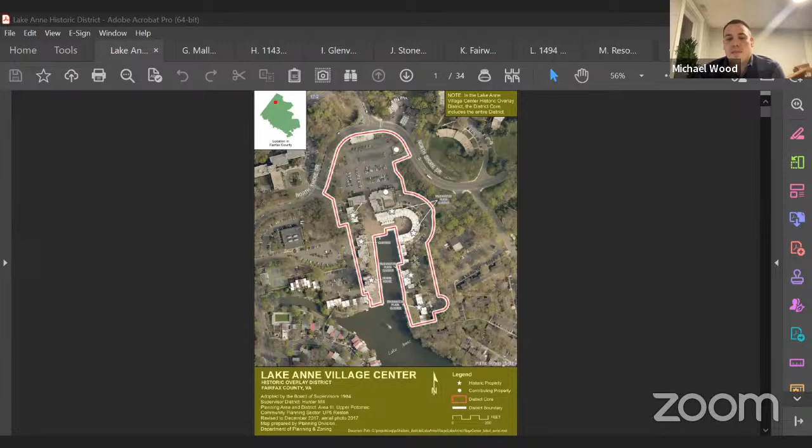It would be good to definitely be able to track applications that are in here and run them through. To me, they should go through almost the condo process first with the condo association, then go through Reston Design Review Board, and then come to the county. Both of us could give our official recommendations on the projects to you all before you guys then review them as a part of the building permit process. That's how I would view it, I think would be the best way. But I don't know which path it took.

But anyways, I do think it is a good idea to get us involved, especially when there are obviously applications in Lake Anne.

And Arisa, you want to drop ARB from it too. Sorry, since you recorded this, I want to make it clear that while in my day job I work for the Advisory Council on Historic Preservation, I am in no way representing them during any of these meetings or when I serve as chairman of the Architecture Review Board. The reason I say that is literally for my day job I do historic preservation work. That's how I know Elena. We intersect through our professional careers.

But yeah, I think that is the challenge. I would encourage, obviously, we want to make sure legal is always providing the right kind of viewpoints when we can. I think if there's something approved by the DRB that's in the historic overlay district, if staff could convey that approval to us, that would be fantastic to know. Because Denise doesn't always have that answer when I put her on the spot. I've sometimes asked Denise if this has gone through the design review board at several of our locations, and if she has it in her file, she can say yes. But because you all aren't a county board and we aren't a local board, there's not that pipeline connecting those two unless we decide to share it. So it might be something to think about: do you want to convey approvals or denials to the ARB if the board feels passionate? Because then at our meeting we can know that for our record.

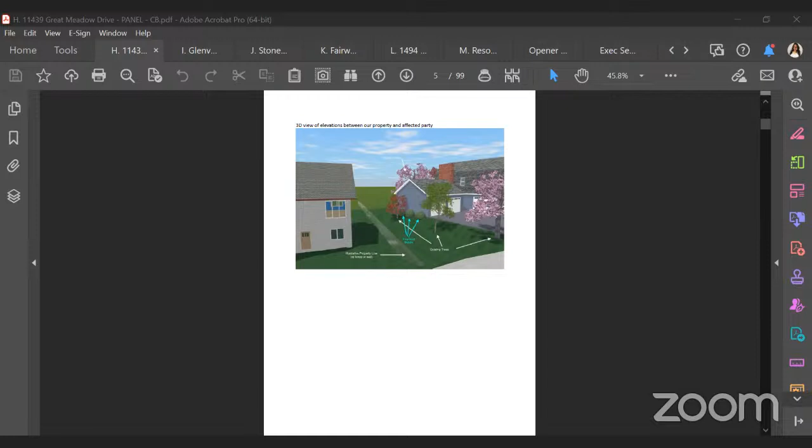Then on the next page, there are two views of the street—driving up and driving down the street, as passersby might see it.

On the next page, there are 2D drawings showing updated distances. Michael, you were correct—there was an error on the drawing about the distance between the chimney and the proposed garage. That has been corrected to 3 feet between the chimney and the garage, which makes the distance between the house and the garage at the front over 5.5 feet.

And because of the reformatted garage, it increases the distance from the affected party's window, which was a point of concern, as well as increasing the distance to the property line. All of which I think are positive changes.

The gutters and drainage amendments that we proposed in the second design review board meeting will carry forward. Obviously it will be slightly different just because the dimensions change, but they'll still run along the same paths and run to the back of the houses.

On the final page, or second to final page, just confirming the reformatted dimensions from 30 by 20 to 26 by 24, as well as the door widths. On the last page are the elevation drawings and related views, including the affected party's house.

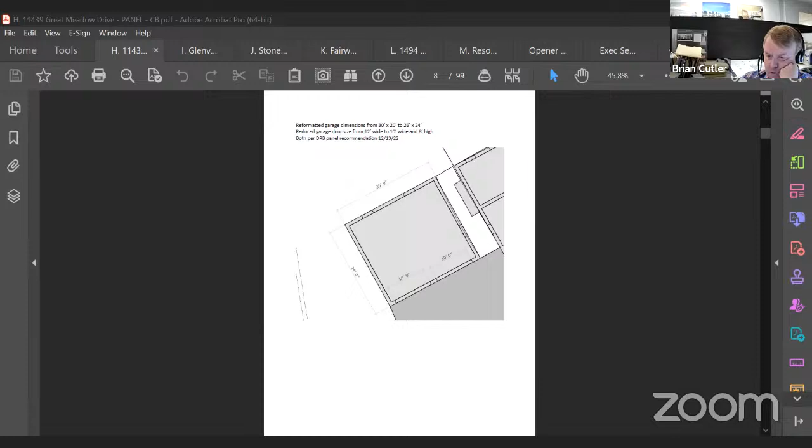Okay, thank you. Brian, did you have any questions? I think the only question I have is, are you expanding the driveway at all, or are you using the existing limits of the driveway? It'll be close. I believe we will need to fan out the back left of our driveway a little bit to reach the edge of the garage, but I would not consider it overly significant.

Okay, I only asked because I'm wondering about the couple of trees you've got between you and your neighbor. I'm not sure where those fall, if those would be affected by this fanning out or widening of the driveway. That's the only reason I ask.

Thanks. Yeah, going from the street back we have a cherry tree, a maple tree, and a Japanese maple. The first two, the larger older cherry tree and the newer maple, definitely not affected. We don't think the Japanese maple will be affected either. If it was affected, it'd be by the garage and not the driveway, and if it were affected, we have plans to move it or relocate it because we don't want to lose it.

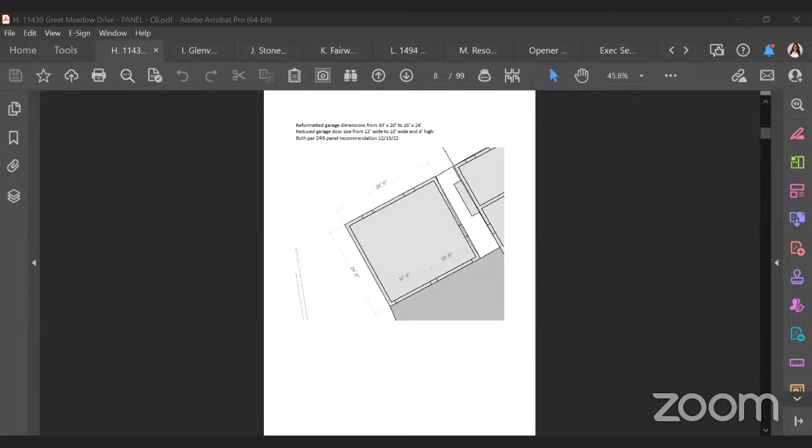Thank you, I agree with everyone else. I think the revisions you made are nice. They made some nice revisions, so thank you. John? Well, that's exactly what we asked him to do, and I have no problems with it.

Bruce, any comments? No, I don't. Mike B? Nothing for me. And Jim? Nothing from me. All right, and I don't have anything either.

The only comment I would say is I think it turned out much more improved than when it first came to us, for the better. I think it looks really well put in with the surroundings now and with the existing house, so I appreciate you doing that work and getting us these renderings. I know they can't always be easy, but I think it really helps explain why we wanted them, and helps communicate this project a little better. I think that's probably why the affected party isn't here tonight, and also it did help some of their concerns with the massing and scale — this addition is not nearly as large as it originally was looking like. So those are just my comments.

Would anyone want to make a motion? I move we approve the revision. We have a motion to approve. Do I hear a second? I'll second. All right, we have a motion and a second. Any further discussion necessary?

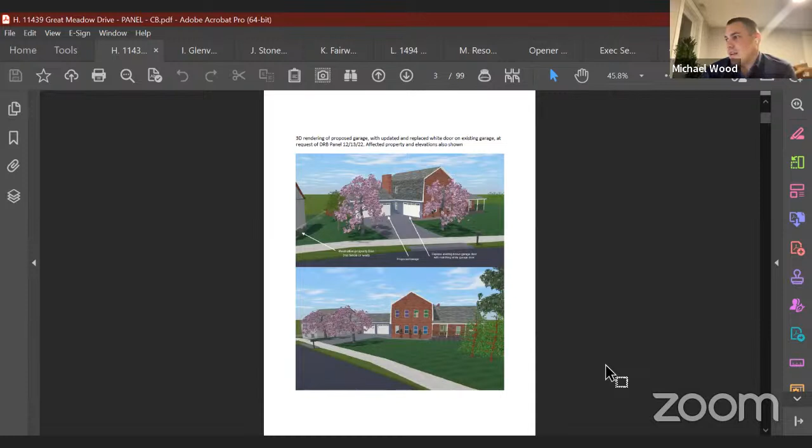Yeah, I mean his letter, his explanation does include those things. Oh, I'm so sorry, I did miss that. Okay, then never mind - yeah, they both call out the pavers and the tree specifically as well. So all things that the applicant has thought about, just for the record.

Any further discussion? All right, all those in favor say aye. Aye. Aye. Any against? Any abstentions? All right, motion passes.

Thank you, Justin. Yep, thank you. And Michael and John, thanks again for your help in December - this helped get us here, so I appreciate it. Thank you, good luck, thank you.

All right, moving on to Glenvale Condominium. I believe they are looking for some cameras. Hi, this is Amanda Rodriguez, I'm their on-site manager. Hi, Amanda. I've been to these meetings before, but never had to speak.

So I'm not really sure what you're looking for me to add to the application. Well, if you could just walk us through briefly what you're doing - obviously it's pretty straightforward in the application, but just walk us through. I think the highlight would be how the cameras are going to be installed, how many of them, and any other pertinent information we ask. But worst case, we'll go around and ask you some questions.

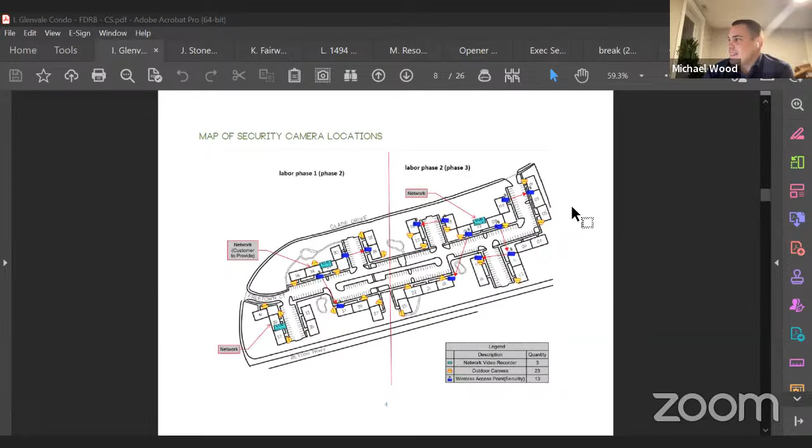It says 23, Amanda - just for the record, it does say 23, then that's the correct amount. All right, 34 is our number of buildings, so that - yeah, sorry. Yep, I know I had a number in my head, it was just the wrong one.

And then we also are proposing signage to just let people know coming on the property and throughout the property that they're under surveillance. Those signs are being proposed to be attached to other signs that already exist on the property so that we don't have to add more posts and all of the other things.

Okay. Let me go around the room and see if anyone has any questions for you, and then we will have some discussion. Sarah, do you have any questions for the applicant? No questions, thank you. Okay. Elena, do you have any questions? No, thank you. Brian, do you have any questions?

But our windows and doors are all that same dark bronze color, which is why we were proposing that color for the cameras. Is that more the camo brown color you're saying? Yeah, that dark brown, close to what your windows are. Yeah, the windows and the frame around the doors also have that brown color.

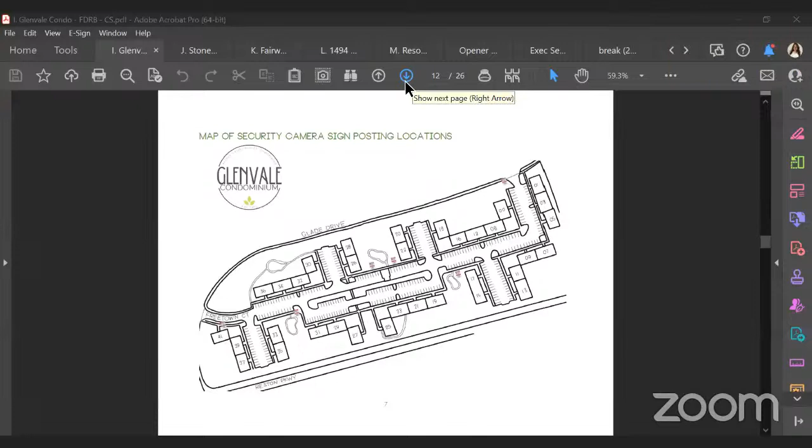The only reason why I'm mentioning that is some of these poles already have two signs on them. If you put a third sign on it, is it going to start looking a little bit crazy? It'll be like the parking signs in DC. Exactly, no one's going to know which one to read and which one's important.

That's my only comment - having multiple signs, I don't even know, staff, do we know if all of the current signage is approved on the property? You may not know that question. A lot of the time some of these signs may not even be necessarily approved. Do we know, staff? I actually don't know if all of the signs have been approved. I only say that because some of them look a little large.

So the only hesitation I have is on the signage. I don't mind the cameras - I think obviously they're a necessity, and I think the proposal is fine. I just think the signage potentially may need a little bit more information. I just want to make sure we're not putting three signs on one pole and it's going to be a little bit messy looking, versus maybe there's a nicer way to put a lower profile sign that has it lower to the ground, just on a single pole or something. I don't know, I just think it needs to be studied just a little bit more.

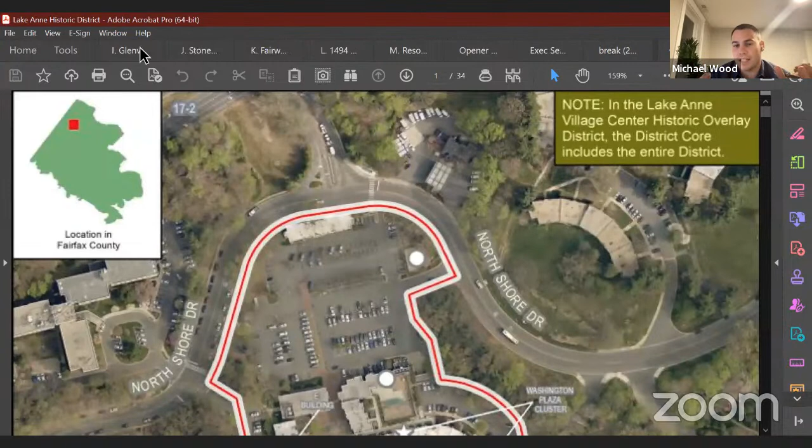That's just my opinion, the board may disagree with me, but that's my only opinion. The cameras I think are good to go from what I see, but the signage I think just maybe needs a little bit more work, and it may be an overall thing with your signage - I almost want staff to look into it. We've had different condo associations come to us with signage before, and we've tried to work them towards a more cohesive approach, less signs but more impactful signs, so people don't just see signs and walk right by them because there's so many of them to read. They don't even look at them, they don't even care. So that's all I'm trying to avoid, basically.

With that said, does anyone have, you guys want to, in the board, do we have any discussion? Is there a motion?

I'd like to discuss the option of just a motion to approve the cameras and deferral on the decision on the signs to let them study it further. Or I'll make that motion. I'll make a motion, unless there's someone else who'd like to discuss, but I'll make a motion to approve the...

Cameras as submitted with the stipulation we're trying to minimize the exposed wiring, that any accessories used to mount the cameras are dipped or colored, however they want to color code it, to match the color of the camera, and that the camera color match most closely to existing window framing, trim, as possible. And defer decision on the sign to give the applicant an opportunity to provide further information and study signage throughout the condominium association property.

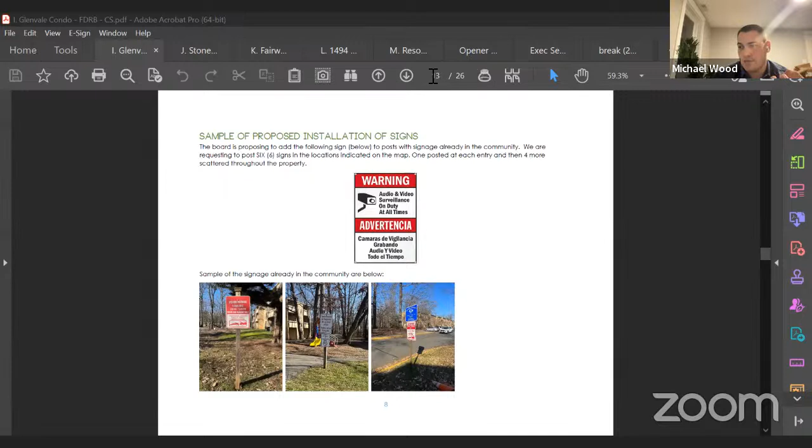What I worry about with the black cherry or dark cherry is that on the computer it may look dark, more burgundy red, but I worry it's going to get up there and actually be red. So I'd rather recommend the camo brown, as that looks closest to a dark bronze, and it will mimic what the windows should be. These windows are old enough that they've probably deteriorated over time, which is why they look closer to black cherry than the dark bronze they originally were.

So that would be my only recommendation to the motion, if you're okay with that, Elena — that I would designate camo brown. I'm fine with that. I am as well.

Any further discussion on the motion? I do have a question. Are we deferring the signage to the next available panel meeting or to the next full board?

It could probably go to a panel. With the deferral, I think they're going to look at providing how many signs are going to be on a pole that they're recommending. Since it's only six signs, I'd like to see what those poles look like with the signage, and I would ask staff to investigate whether the signs already there are approved, or if they need to bring a cohesive package back with the signage overall. So the signage, when they bring it back, should obviously include the size — just want to make that clear.

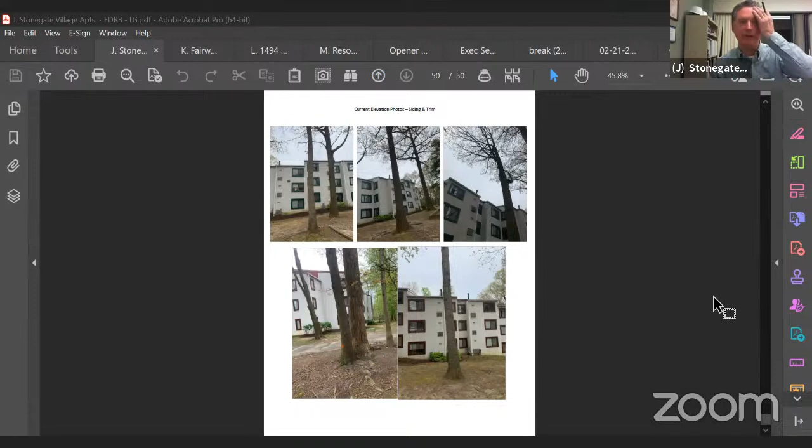So we're about 40% done with design, and we really want to get the DRB concurrence on some critical issues before we proceed a lot further and execute a lot of design effort on some things that we know are of interest to you. Notably these three things: site lighting, landscape plan and tree removal, and exterior.

Just to tell you, the interior is totally changed, all the windows. Right now, we've got a central laundry facility, and we're going to go back to individual washers and dryers in each unit. Not something you guys have purview over, but just thought I'd fill you in on that.

So it's a major project for us. We've got a lot of, before I turn it over to the experts, we've got some challenges on site there. We've got a combination of no sun, probably more topographic changes than any housing area or affordable housing area, at least area I'm aware of in Reston. I'm a Reston resident as well. We're by Lake Audubon.

And we've got some significant erosion problems that we're trying to deal with on site that we've got some solutions for. We're going to need your feedback. And as I'm sitting here going through the other applications, thinking a big part of this really, at this point, is us understanding what we need to provide you guys in the future to fully satisfy you on these big issues going forward. So we really realize we probably don't have it all, but we want to be super clear on what kind of things you might want to see to again satisfy your concerns in these three major issues.

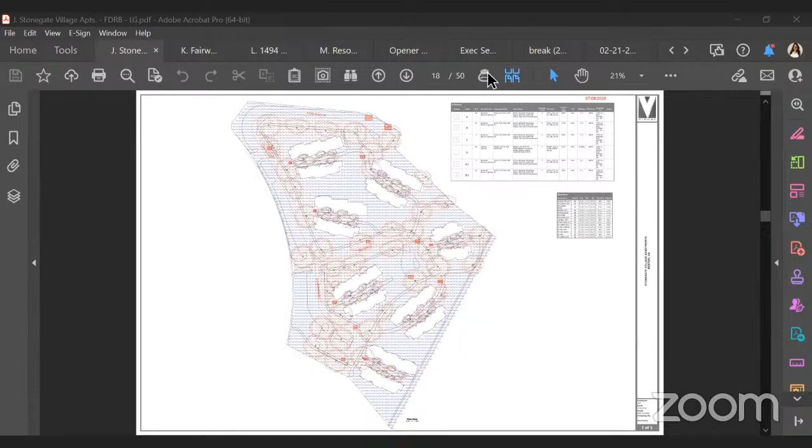So I guess what would be the next topic? Do you want to talk about the siding, or do you want to talk about the landscape? No, okay, that's fine, all right.

So I will pass this on to Connie and Lori Beth from LSG. Great, thank you, Kathleen. My name is Connie Finn, and I'm a principal with the firm LSG Landscape Architecture. And with me tonight is my colleague Lori Beth Donachie, the arborist. The renovation work impacts some of the trees on site, and we're here to present the proposed ideas, and want to seek some of your input as well.

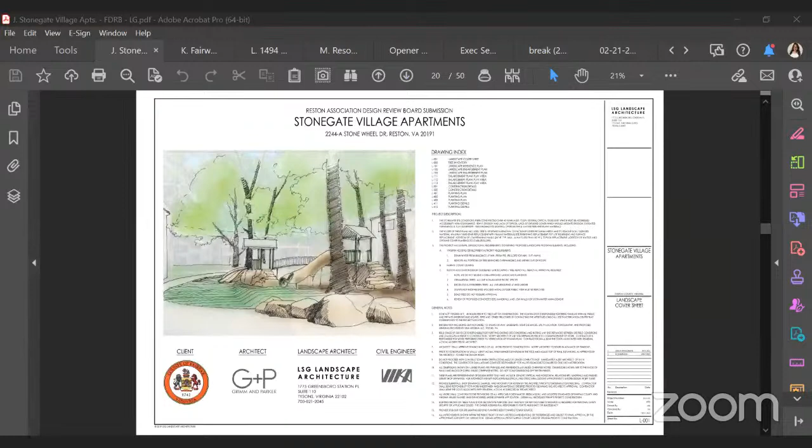So if you don't mind moving to the next sheet. The firm has done some tree inventory work, and Lori Beth, if you don't mind, give a high-level summary of the conditions of the trees currently on site.

Yes, so as you can see, we surveyed a couple hundred trees on the property. We went out and identified the species and the tree conditions. There are a number of species in between the buildings that are non-native, like crepe myrtles, Nellie Stevens holly, and magnolia. They've reached their mature size at this point, and they're very crowded and leaning, not providing good form to the tree.

Around the edges there are larger canopy trees, and we did have a number of trees starting to decline for reasons related to species. Some of them are white pine, which are just more short-lived trees in a landscape setting. Others show decline from storm damage over the years. So there's a number of factors impacting the trees on this site.

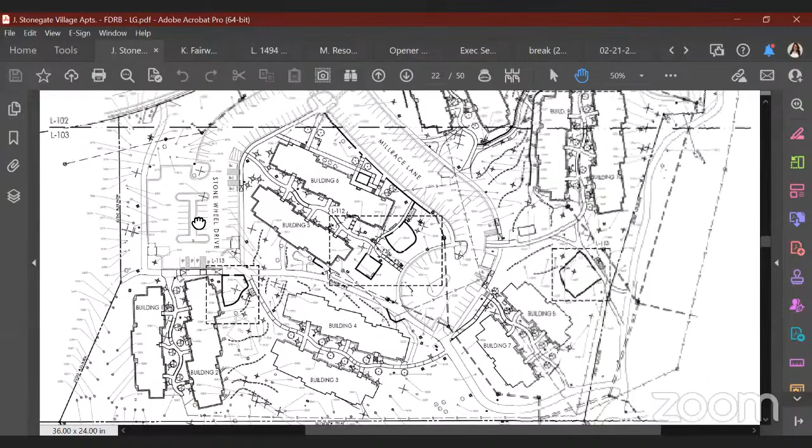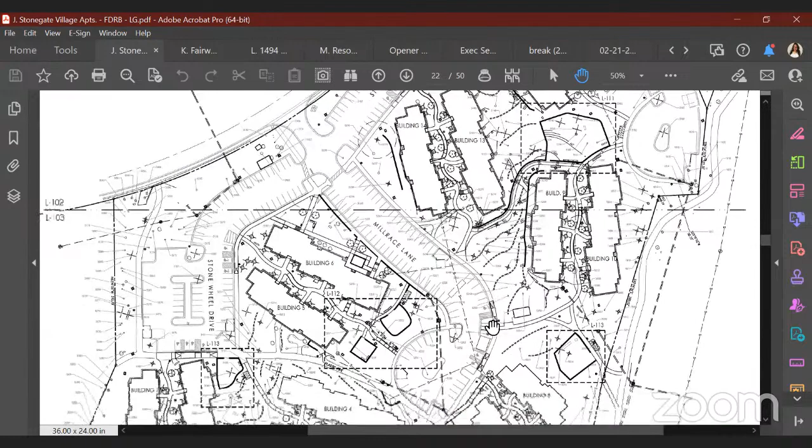And the views, as Kathleen mentioned earlier, the walkways leading into the entry to these apartment buildings are not ADA compliant. They're simply too steep, at about 7.1%. Part of the project also recognized that the current playgrounds are not up to code and not ADA compliant either. Also, as part of the fair housing requirement, we need to identify ADA parking spaces that would link to the ADA building entrances.

The team decided that in order to adequately address the ADA issue, the walkway between the buildings within the mews space needs to be regraded to bring it up to today's standard. That's why on some of them you can see they're much more meandering in alignment. The purpose is to increase the run of the sidewalk so you're able to minimize the slope as you walk down between the buildings.

What does that mean? Once you have to regrade within such a short distance between the buildings, it impacts existing trees like crepe myrtles and magnolias. As Lori Beth mentioned, these are non-native trees that have reached their maturity level, and as part of the regrading the disturbance will get into the critical root zone. That typically means the tree will have to be replaced.

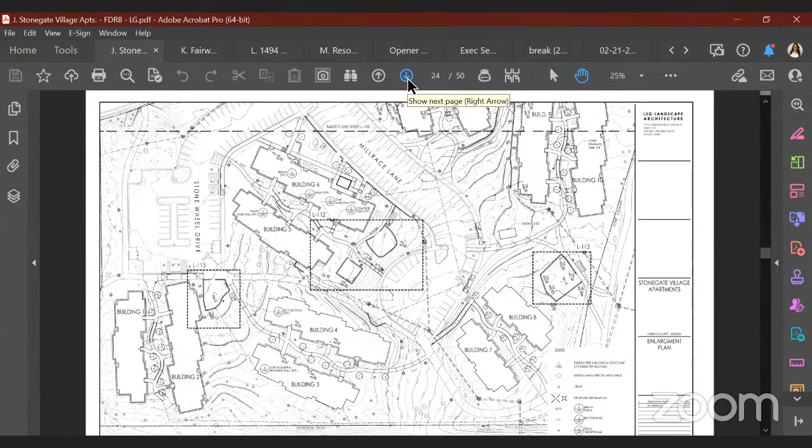Next slide, do we have? These are the earlier drawings we identified within the— I don't know who's controlling the screen. Staff, can we go down to like page 30 where it actually shows this landscape planting plan? Oh great, wonderful. Yes, thank you, thanks for flipping to that screen.

Even though the team has to remove some trees as part of the ADA compliance activity, as well as addressing the erosion issue, as you can see on the screen, the shaded areas are what's currently planned to receive additional landscaping. When we say additional landscape, we're talking about ground cover, shrubs, ornamentals, and large trees, once the county finishes the walkway system upgrades.

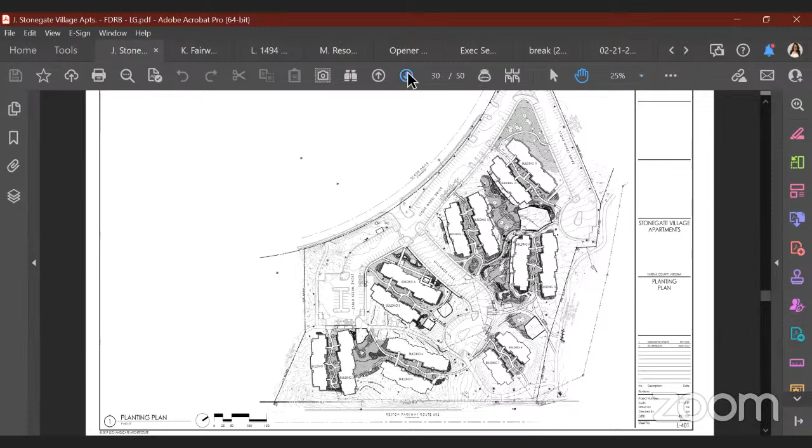Staff, if you go down a page, we can get a better zoomed in version of what they're talking about. Yeah, right.

I believe we are proposing over 500, right, Lori Beth, in terms of just quantity altogether? Yeah, approximately 500 new trees and shrubs being planted in addition to the trees that we're preserving.

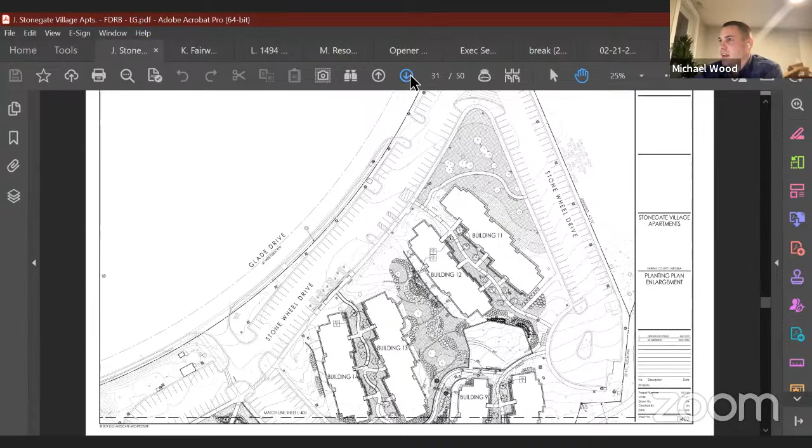If I could interject, is there any sort of schedule that designates what these all are? I didn't see anything, and I was curious if I was missing the page. Is it page 33 here? Normally they're labeled with letters or something, but it's strictly the picture, and we have to designate what they are on the table above. It's just kind of hard to read. Is that correct? I have to match the picture to this table to figure out what they are.

This is the plant schedule, the proposed plant schedule, Mr. Wood. The trees have been identified with symbols on the left-hand side, so are the shrubs. They have all been identified, with quantity as well on the second column. The ground cover has not been, since it's a family of plants that we identify differently. Like Tony said, this is earlier in the design phase. We typically don't get into the specific ground cover choices, but the trees as well as the shrubs have all been identified.

Okay, yeah, no, I understand that part. I guess I'm trying to figure out, for example, building 3, what that plant is that you're putting in. It looks like there's 20 of them to the left of building 3. Going down here, it could be a magnolia, it could be a flowering cherry. They all just look similar at my scale. So I'm just trying to designate what they are, that's all I'm saying.

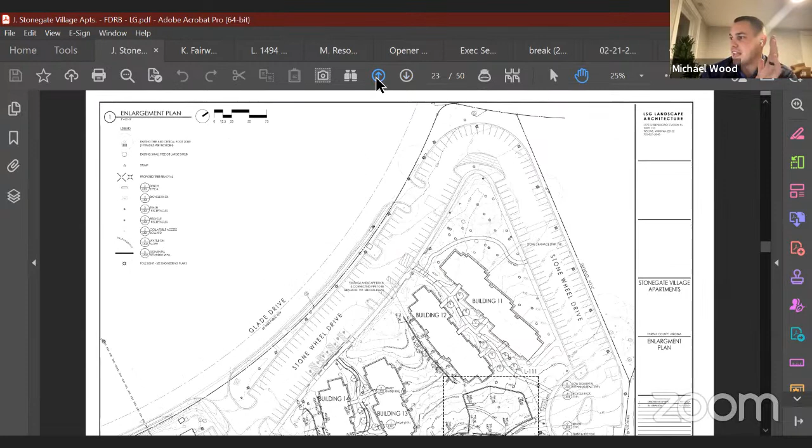And I appreciate that. That's what I guess, at the scale of the drawings and the way they're being depicted right now, it's hard for me to follow, and I'm just speaking for myself, maybe other board members could tell. I can see the new plan, I see that there's lots of plants going in, but I don't see exactly what the impact is on the site. I think Mr. Wood, if we got the PowerPoint in there, it would have this very nice summary. What Tony is referring to is currently we've identified 174 trees to be removed.

Because of erosion between the pairs of buildings, you can see squiggly lines on the plan. Those are the anti-erosion measures we're planning to implement within the wooded area, called biodegradable wattles.

Within that space, we've identified 30 trees to be removed to address the current erosion control issue. For the rest of the site, we've identified 43 trees scattered throughout that are having serious health issues, marked as potentially to be removed.

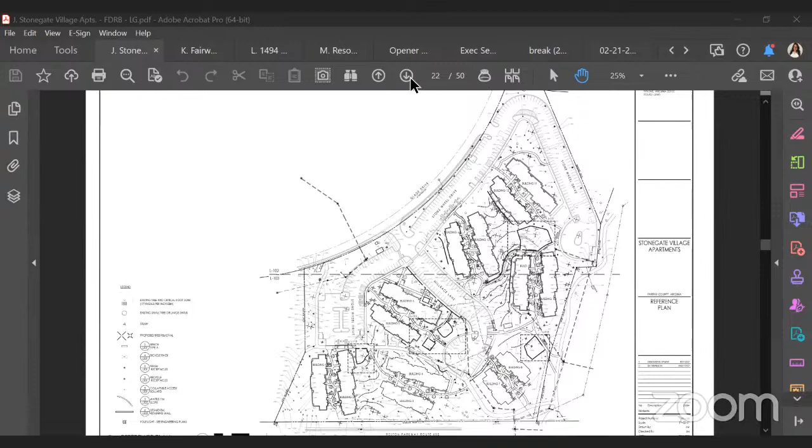The summary is on the first page, the tree inventory, probably page 21. All of them are identified there. Altogether, there should be 174 crosses.

Just full transparency, it's very difficult to read this. That's all I'm stating.

Tony, I think you're making it clear. It was on my agenda for action tonight, so the way I take it is I have an application I need to vote on tonight. If it sounds like maybe you guys are just looking for conceptual approval, where we're going in the right direction, but you'll come back with much more fine-tuned documents.

We had discussed early on that this was a working level meeting, and I think maybe that got missed. That was always our intention, to show you what we have at a schematic stage and get your input back on those key items.

I don't know how that decision gets made. This is new to us. This is again a very large project that we're still feeling out the sequence of work on. We can provide you whatever you want.

I just want you to be super specific as to what information you need from us to make you satisfied with the level of landscape changes we're doing here. We're getting to the siding in a minute, but that's what we're looking for. I don't know what that means as far as a response, but we'll figure that out.

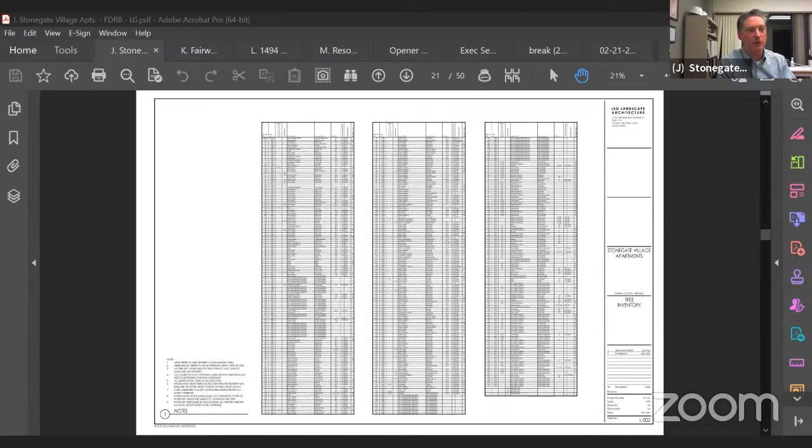We're not sure on the exact steps, but we tried to address that by putting the information in a different format with the PowerPoint. I guess we weren't, and that didn't make it for some reason. We struggled with how to present this because it is a little different, given the size of it.

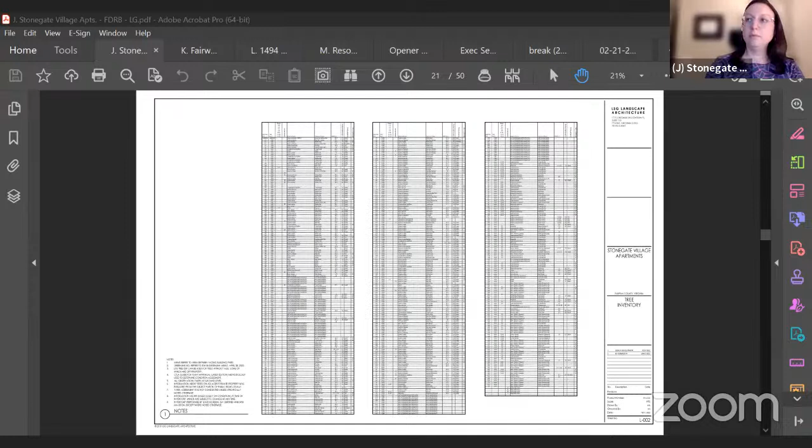If I may chime in here, the drawing on the screen was submitted as part of the Resident Association submission, and these are meant to be printed at 24 by 36 inch format, not viewed on screen obviously.

Agreed. I think that's maybe where a working session, since this is so big, would be great — where we have a big roll of plans, we can lay it out, walk the site, then go back to the conference room and walk through exactly what we're going through.

I do think probably not having the PowerPoint is hindering the presentation from being able to understand it fully. But I think since we're here tonight, we can see what you guys are trying to do. At the end of the day, you're trying to improve the property, bring it up to code, and beautify it. I think I understand that goal, but I just think we'll obviously need more information.

So let's go through maybe the siding and the windows. And I think there's also, before we pass it, the playground. I'm sure the PowerPoint maybe had some more. My initial thing is I'm going to need some color - okay, what color is this going to be? What are we going with? But now that I know this is conceptual, my questions kind of change.

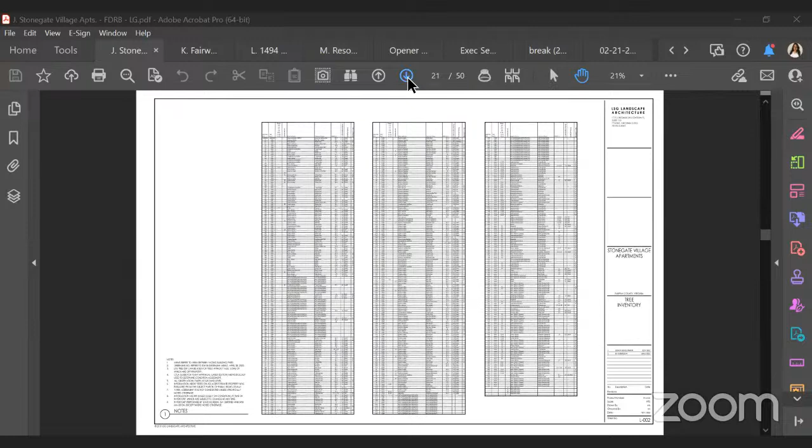So if you guys want to talk about the playground we can, or we could just jump to the siding and windows - it is in the package. Now that I know which package you're showing on the screen, start with sheet L110, 111, 112, and 113. Those are the playground - that's slide 25.

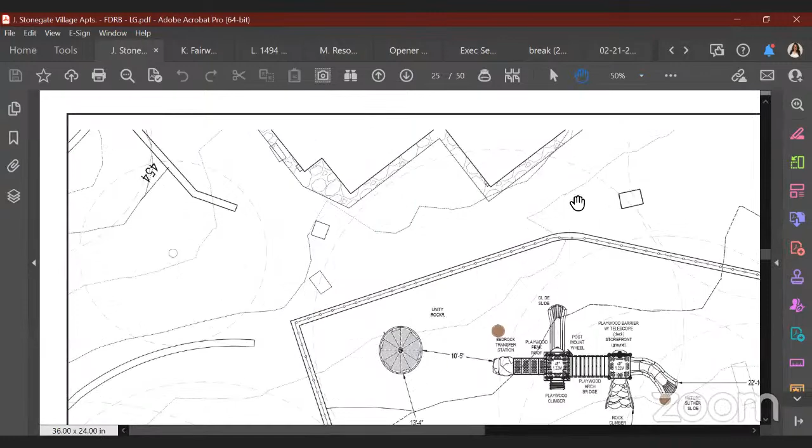So the problem with the current playground: first, the equipment is hugely outdated and presents a safety issue. Secondly, there's an accessibility issue. This playground was probably installed around the same time as the apartment came into being. You can see a couple of mature trees, and the whole idea back in the day was to nestle this playground amongst the trees. It has sort of matured over the years, and you can see tree stumps there.

The other thing is, in order to nestle a playground within a cluster of trees, there's an accessibility issue because from the common sidewalk to where the existing trees are, there's a significant amount of grade difference. In this case, you can see from this proposed playground realignment there are 4 contour lines, and you can tell there's an existing grading issue.

So part of the improvement is really to address the ADA requirements. Fair housing requires playgrounds within cluster development to set aside certain playgrounds to be ADA accessible. So given the amount of units, we identified 2 playgrounds that would be ADA accessible, right off that improved accessible route. The rest of the playground we're going to try to keep as much as possible, for the purpose of preserving that existing canopy, which currently seems deemed healthy. So we will stay within that area and put some new play equipment in there, replace the existing surface with engineered wood fibers and accessible material, and observe the safety zone that is a requirement of today's safe play standards. Overall, it's really bringing the playground up to today's standard.

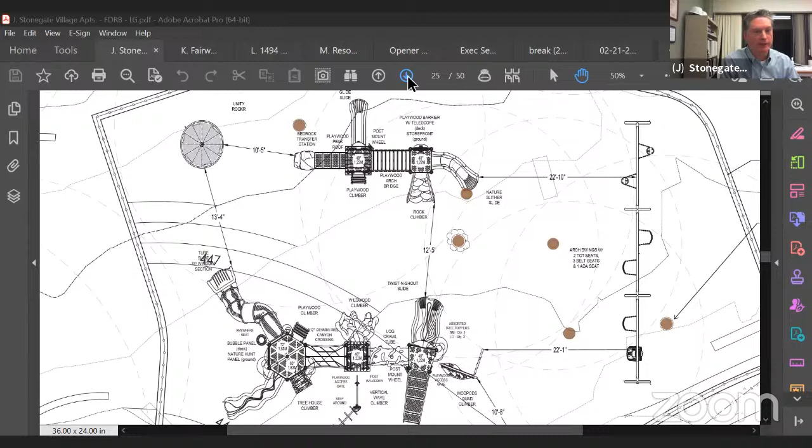So just to reiterate, it's a concept level, schematic level submission. We've got a lot of detail to provide on exactly what's going to go there - elevations, cut sheets, things like that. At this point, if this generally looks like something that's acceptable, that would be the extent of what we would be looking for from you.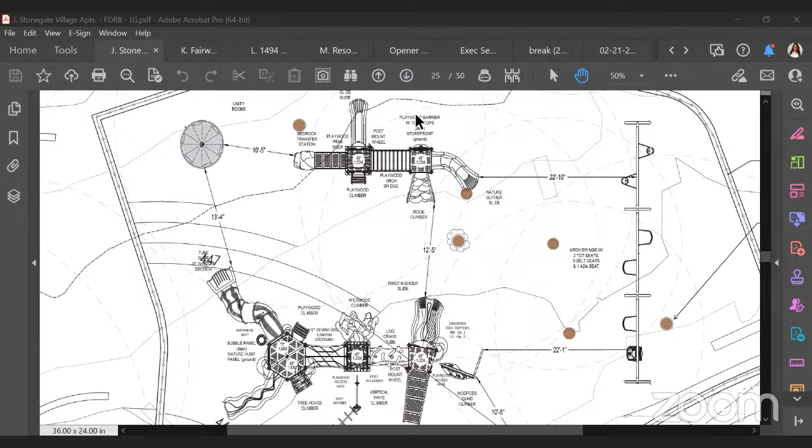Okay, great. If you guys could walk us through the siding and windows, and then we'll go around the room and see if anyone has any questions for you guys, okay?

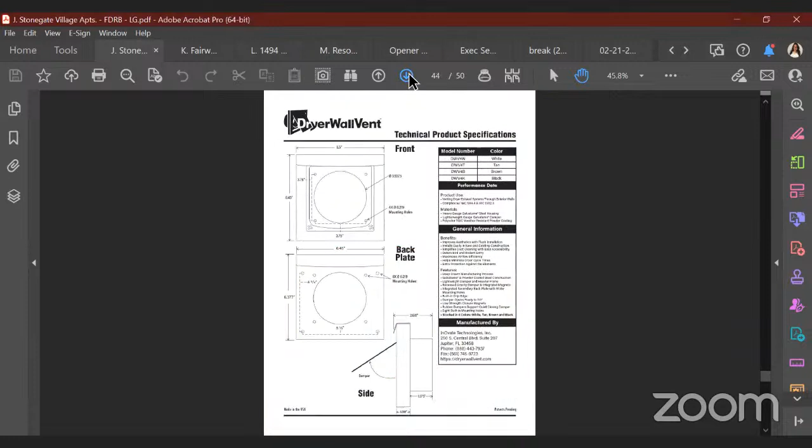And then I think you also have the louver size. The louver, that's the dryer vent still. Yes, it's a through wall unit. The size of the louver for the new unit is slightly different than the existing, so that opening would be modified slightly to accommodate the new louver.

I believe those are the highlights, so if you have any questions...

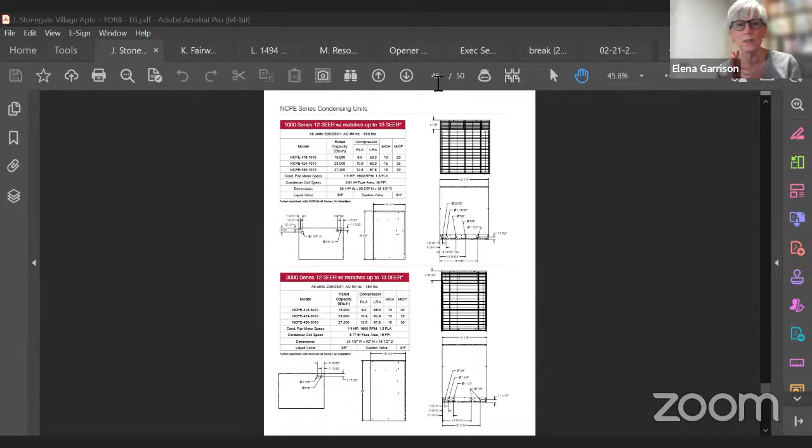And then if we could look at the window options again. I forgot which direction they're in. I'm on that page, I'm on page 37 on my screen. So yeah.

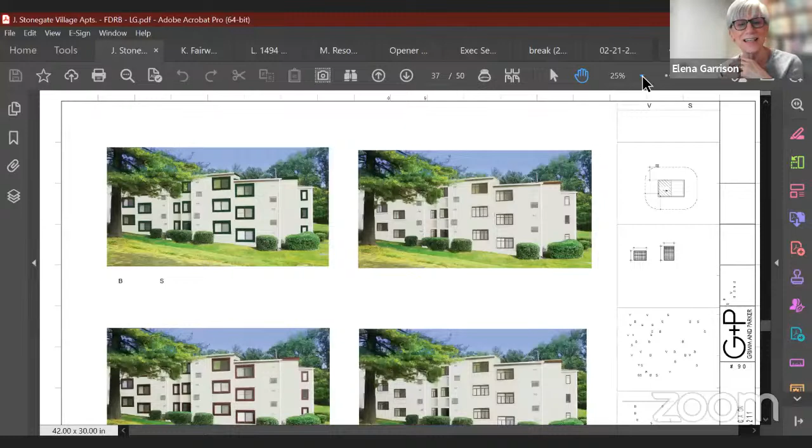So I think that the wide trim gets lost on the elevations on the right, and since there is so little articulation in the elevation, I see them in the drawing but they're the same color as the siding. So I just, those windows on the right seem very precious, I guess, compared in scale to the one on the left, which is more like the original.

Okay, I personally don't, I like the idea of breaking the windows up with mullions, either the top right or the bottom right, but I think you need to consider the trim more so that they just don't feel so lost in the elevation. So those are my comments.

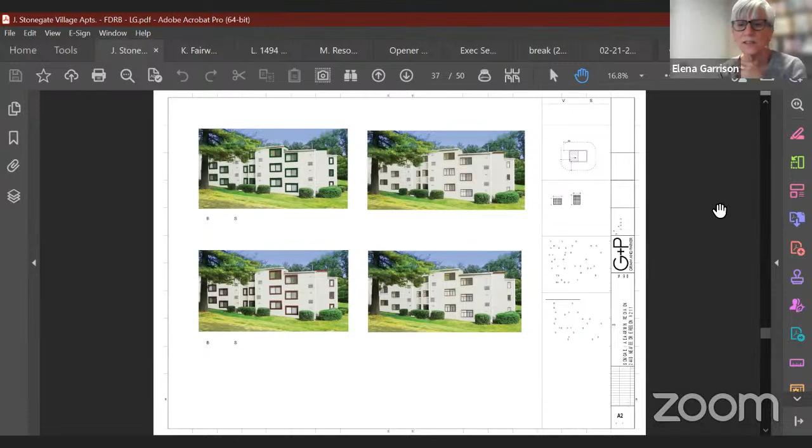Okay, so I guess though conceptually it sounds like it's acceptable to use HardiePlank instead of and not replace the stucco in kind. Personally, I think it is fine. The HardiePlank is going to give you less trouble over the years and going to hold up better. Thank you. Thinking about the color combinations.

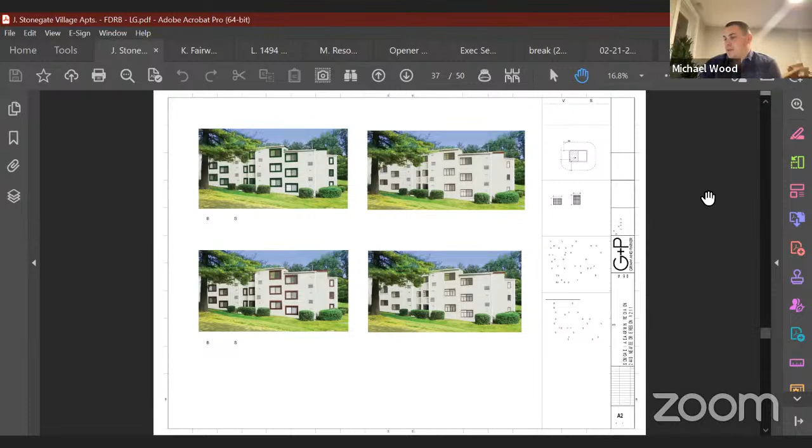Brian, did you have any comments or questions for the applicants? Yeah, just a couple questions and some comments also.

Looking at this elevation, I think coming back with rendered elevations of each building would help us understand if you're grouping them in clusters of three, like cluster A gets this palette and cluster B gets another one, or how you plan to mix and match those colors. The rendering on page 36 does a really good job of showing how you're mixing and matching, but what we'd expect to see is a full palette and rendered elevations of every building so we can see how they all play together.

So you're not envisioning more than three colors? No, not at all, it's totally up to you. I just think being able to fully describe and show what those end up being, showing how that goes through all 14 buildings, would help.

And one question, what are you picturing for the paving material through the mews and around the site?

I'll defer to Connie on that. I believe it's concrete. For ADA, they're very particular about slopes, and asphalt is tough to do accurate slopes with. Concrete lets us really nail that down, and inspectors want to be absolutely sure the slopes are acceptable, so we get better control with concrete. We could texture it or something like that, but concrete is what we propose.

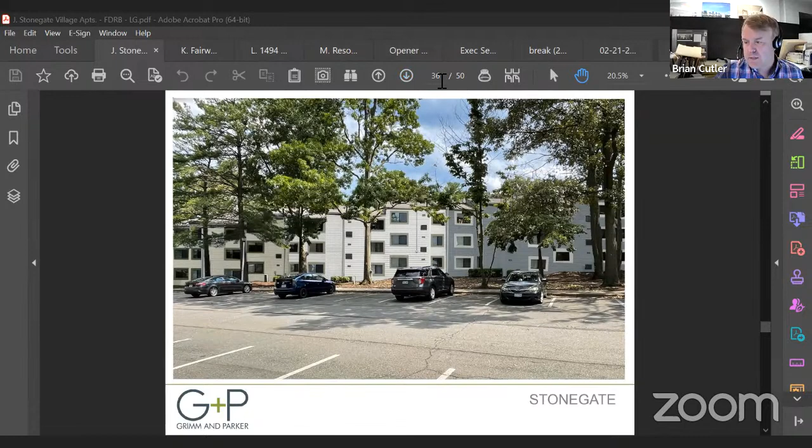Brian, any other questions? Yeah, my last comment is about the areas around the tot lots. The views we've gotten here are detailed nicely, but strictly from the guidelines, it talks about screening them with vegetation to reduce visual impact from the neighboring apartments. The way it's rendered now, it looks a little sparse in terms of landscaping or screening. Was that a choice to make them more prominent, or will you enhance the landscaping plan around those tot lots?

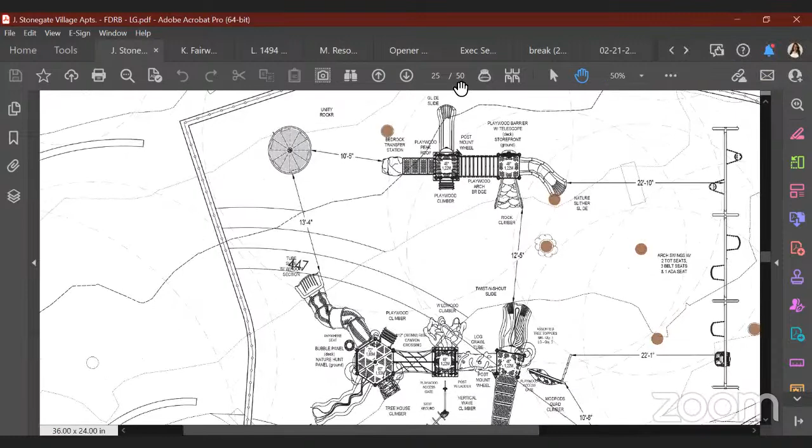There are two types of playground here: one suitable for kids below 5 years old, and a different kind for ages 5 to 12. For kids younger than 5, it's recommended to provide some sort of barrier to prevent them from running away from their supervisors, nannies, or parents. In terms of landscaping, as illustrated in the previous exhibit, the intent is to add some shrub masses back to the site, and we can certainly add some around the playground to better guide the kids' behavior.

The elevation shown previously, I believe, was strictly for the purpose of the veneer facade discussion, which is why architects generally like to keep landscaping to a minimum so you all can have a full view of the elevation. But once the project is implemented, there'll be a more holistic review of what that vegetation means to the facade.

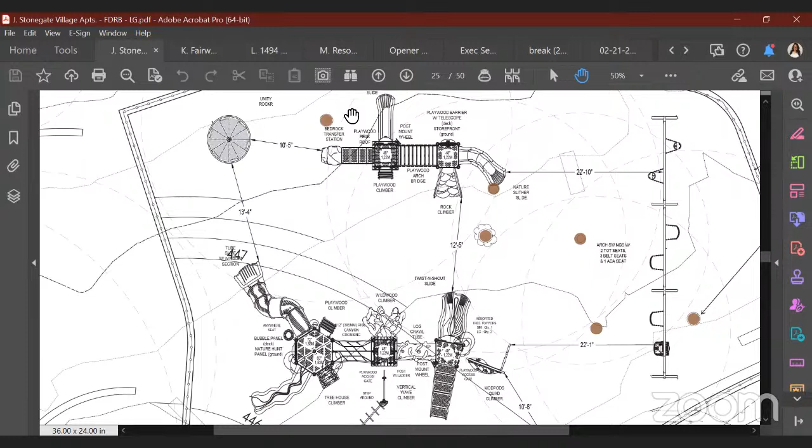When I saw this come across as one of our projects to look at tonight, I was very excited about it because I think that apartment complex has gotten very tired looking over the years. I'm excited to see there's some renovation going to be done on it. I think the HardiePlank will provide an extra level of detail on the facades of the buildings, to provide a little more scale to the mass of the buildings. Looking forward to seeing the development of all of these ideas. I think they're going to be very nice, but we'll want to see how they develop. We've been told it's like 40% review, and I think there's a lot of room for things to be fleshed out and looked at. So thank you very much for bringing this to us.

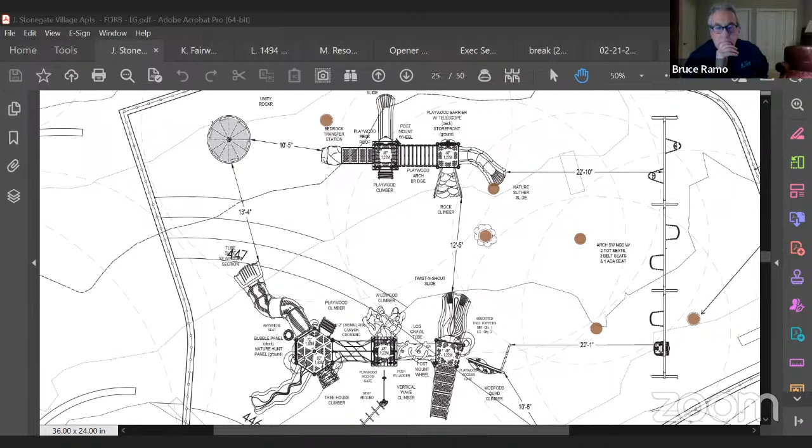Bruce? I agree with those thoughts. I think we're looking forward to getting more detail, and I was wondering whether an on-site meeting might be a good way to help the applicant move forward with that. We're definitely up for it. Okay, yep, I agree.

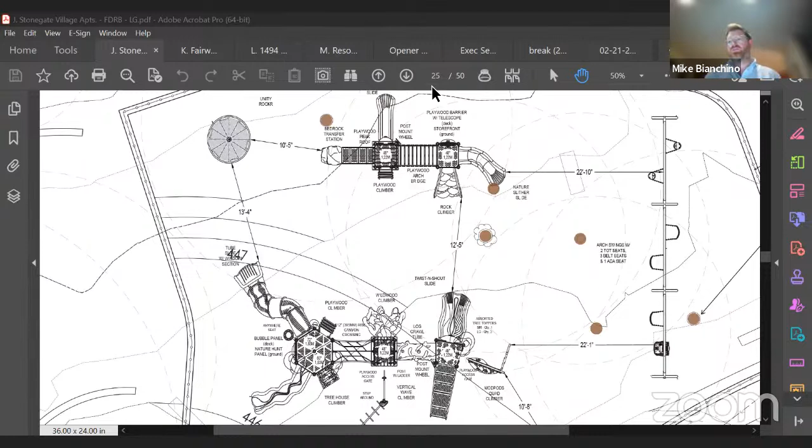Mike B? I would echo Elena's thoughts with regard to some of those colors on the HardiePlank. That white, having seen it in person, is really stark. But yeah, it's exciting, looks like an awesome project. Looking forward to some more details in the future. And I think Bruce is spot on about meeting on site and taking a walk.

And then Jim, you have anything? Yeah, it would be nice to see how the variation in the color schemes is not only applied to the different groups of buildings, but also how that interplays in these pairs of buildings in the mews areas, because I think you have a real opportunity to make these large buildings much more interesting and bring the scale down. So it'll be interesting to see a perspective view through a typical mews area and how the variation in colors can play off from one building to another.

I would add to that comment: some of the recent townhouse projects we've been looking at, new construction and stuff, have done a pretty good job on that kind of thing. So it might be interesting to share some of those ideas of how various related but different colors can interact with one another and provide continuity, but still a change in scale to the building appearance.

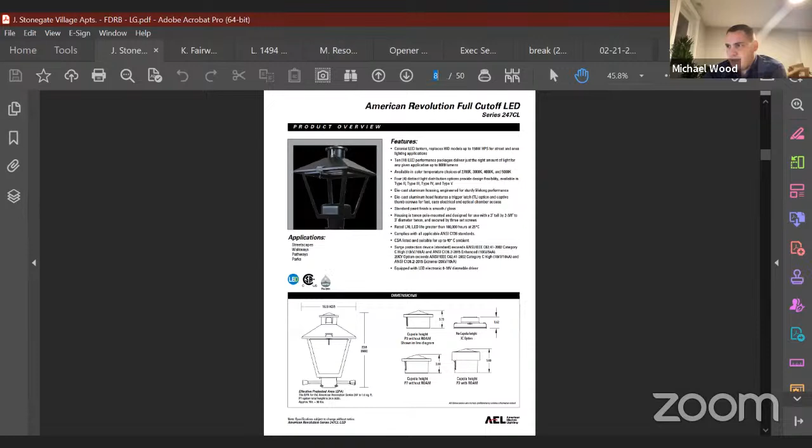The other fixture is along the walkways and in the mews, and I believe this one is also full cutoff, meaning it is dark sky compliant, but I will double check that. I'll make sure all of the fixtures are appropriate.

I can speak to that since our firm is involved with some of the zoning updates right now. Both fixtures are cutoff. You can see the village style, the previous one, it does not have a lens on the side, and the light source is coming from the top.

Okay, and what color temperature are you guys thinking? I'm sorry, what color temperature are you recommending for the light? Fairfax County's requirement is 3000 K. Okay, great. Right, and then go ahead, John.

No, I was making a comment, but go ahead.

Okay, we also recommend 3000 K max. That's what I would recommend here. I think you guys have enough coverage that the color temperature should be adequate.

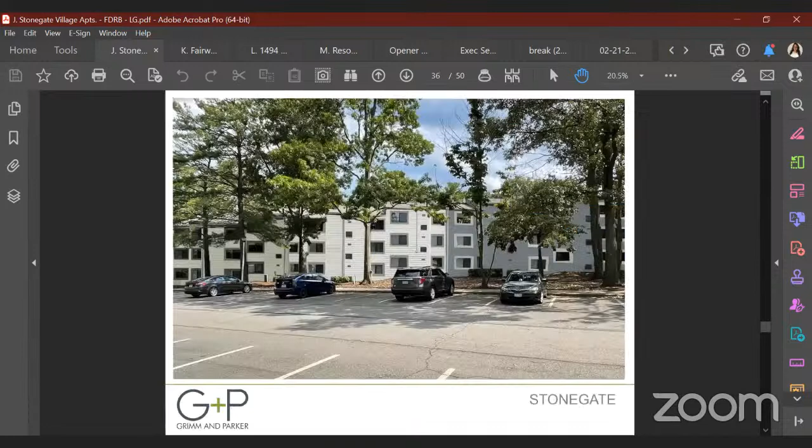The siding, I think, is a good upgrade. I don't know anything about the existing structure that's there. I don't know if it's real stucco with a scratch coat and metal lath, or if there's any insulation involved with the stucco right now. You guys would obviously investigate that before you attach the siding. Yes, that'll be a major component of the design. We were very anxious to have your buy-in before we did a thorough deep dive into how it would attach.

Yeah, and I think overall it's a good upgrade. I'm still hit or miss on the windows, I think we maybe need some arrangements. If you go to smaller windows, they probably won't be egress compliant, if I had to guess. I'm assuming a lot of these are on bedrooms, etc. I don't know how much we can really make them broken up depending on the one window arrangement - I don't know if that would be egress compliant or not.

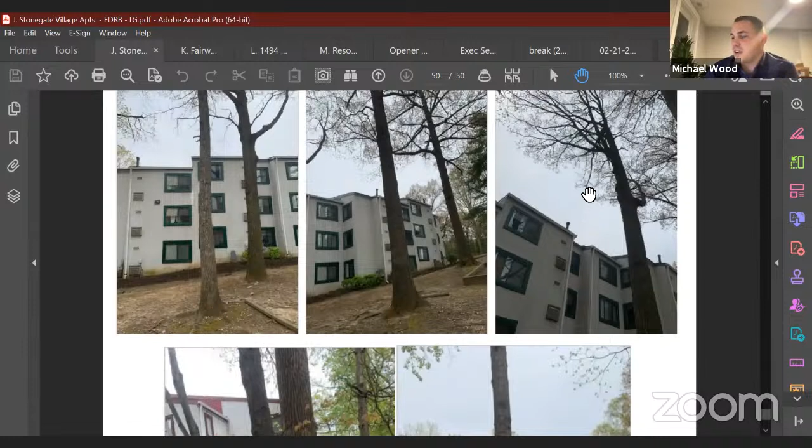We're not proposing making any of the openings smaller. It's just a patterning on the glass, just Muntin. Gotcha, that'd be fine. But the windows would be getting all replaced, correct? Yes, that is correct.

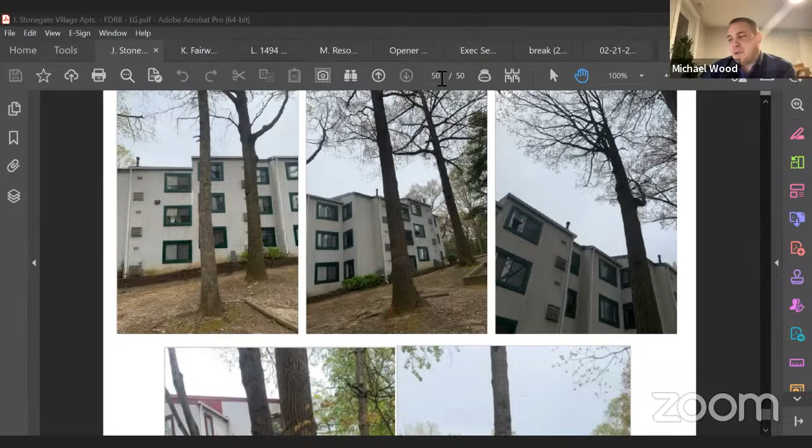And then the only other aesthetic thing, with the trim - the large trim to me has always stuck out, and it's almost, I don't know if it's too bold. That's just been my initial thought with this complex ever since I've seen it, since I moved to the area about 10 years ago.

Are you proposing - I don't know if that's an 8-inch, it's definitely thicker than most. I'm wondering, on some of the rendering, are you guys going back with the 8-inch? Are you thinking of scaling it back to maybe 6-inch, or have you guys given that any thought? I think we would just want to know where that lands.

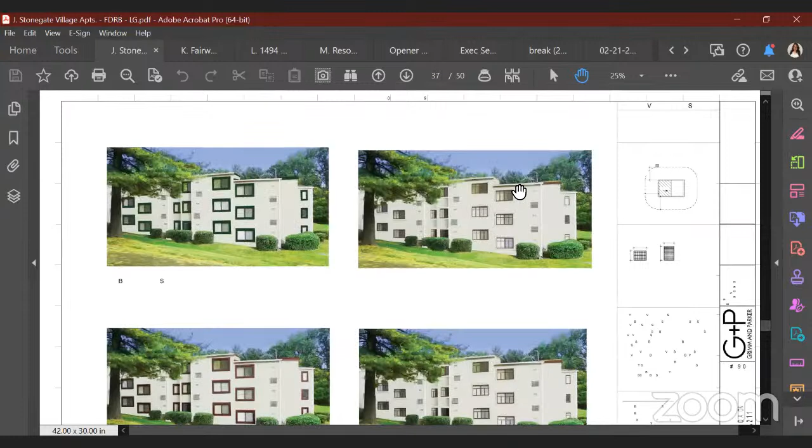In that one image that had the different Muntin patterns, you could see - and I believe Elena mentioned it - there were some where we were keeping the larger trim, and others where, as you can see in this image, we were minimizing the trim. So we'll definitely work with you and come up with the right solution. That's a smaller detail we're looking forward to working with you on and finding the right fit, but you can see some differences we were exploring.

Great, so I guess what I would say is I honestly don't think there's - I think you guys are going in the right direction. I don't think there's really enough that we can give you a conceptual approval, but I don't really know what I'm conceptually approving at the moment. Minus maybe just that you guys can keep exploring Hardie siding and the lighting replacement.

The trees - just based on the presentation that I have, I don't fully understand what's happening. I understand there's a lot of tree removal, a lot of large canopy going away, but I don't fully understand it without, I think, a site visit. So I wouldn't want to conceptually approve that and then get out there and say no, these 50 trees, we'd like to try to save that canopy, whatever it be, right?

So does it help you guys in any way to have a formal conceptual approval on the Hardie siding or the lighting, or is just hearing our feedback enough?

I'll leave that to Tony. I'm pleased to hear the comments that you have. Are you good with that, Tony? I think we're fine. I haven't heard any opposition other than colors, so I think that gives us a level of comfort that we can proceed with that.

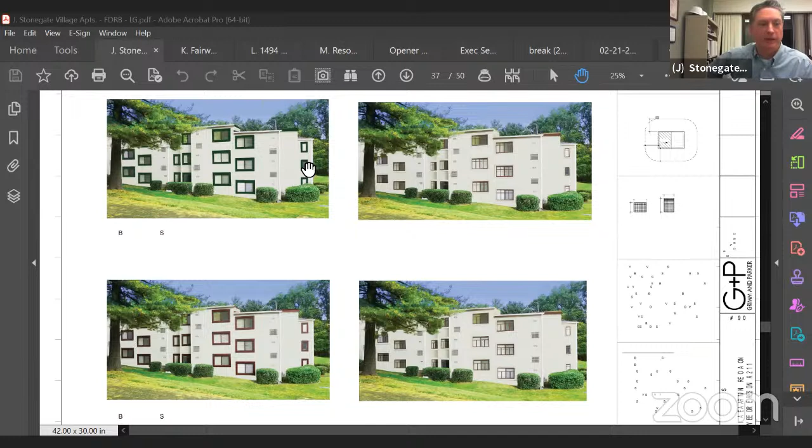You guys always have a couple blank canvases there where you could theoretically paint the stucco and do some mock-ups, full-size mock-ups of the paint colors ahead of time, and really get a good feel. Even if you just paint a 3x3 swatch with some trim next to it, you might be able to get a good idea of some of the color combinations out there.

Since it's an action item on my agenda, I'm going to recommend it for a deferral to allow them further study. There are good concept ideas happening here, but I'm going to make a motion to defer and recommend also an on-site walkthrough with the applicant, with any DRB members that may be willing to volunteer to attend said site visit.

That way we can make a motion. So there's a motion on the table.

Mr. Wood, if I may interject here, for whoever might be interested for the site visit, will you please provide the name? We will print out some large format sheets so that the tree information will be available to them before the site visit. That would be perfect.

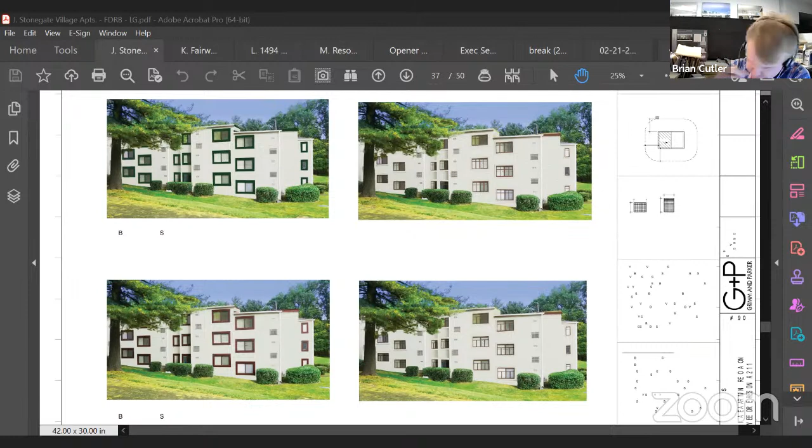So there's a motion on the table. Do I hear a second? Second. All right, there's a motion and a second. All those in favor say aye. Aye. Aye. Aye. Any against? Any abstentions? All right, motion passes.

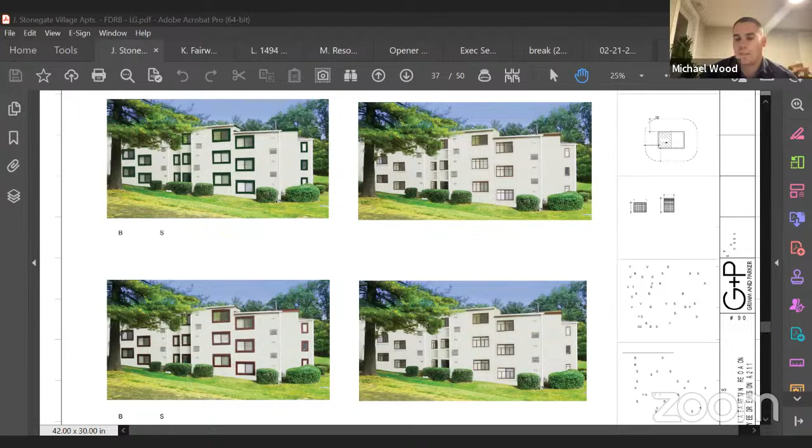So we'll get together, we'll email staff and board members. Just send your interest to staff. LaShonda, please remind us to reach out, and then maybe we can try to set something up for early next month, where we can get out there on site. Okay. All right. Thank you.

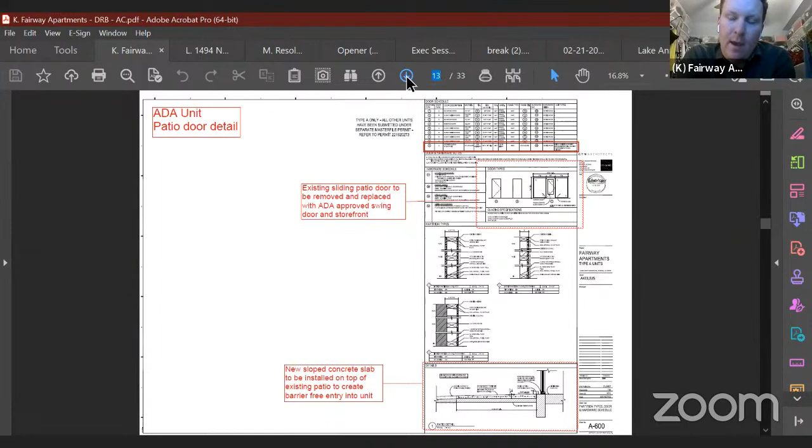So basically what we're planning on doing is replacing handicap accessible doors at the rear patio entrances. Essentially, we're going to be turning the rear patios into the entrances for these specific units. It's a total of 5 units, and we will also pour a sloped slab on top of the existing patio slab in order to create a barrier-free entry.

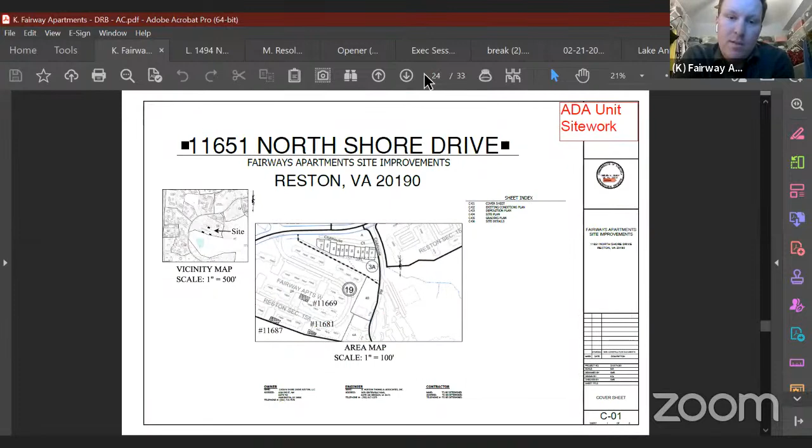And then we'll be making parking lot adjustments and pouring sidewalks to the rear of the properties, to the rear of the units, in order to make a handicap accessible sidewalk. That's all going to be happening across a total of 5 units, occurring on 3 buildings - those 3 right there that you're showing.

We'll also be adjusting the parking areas to provide accessible parking spaces for the residents, along with handicap accessible signage.

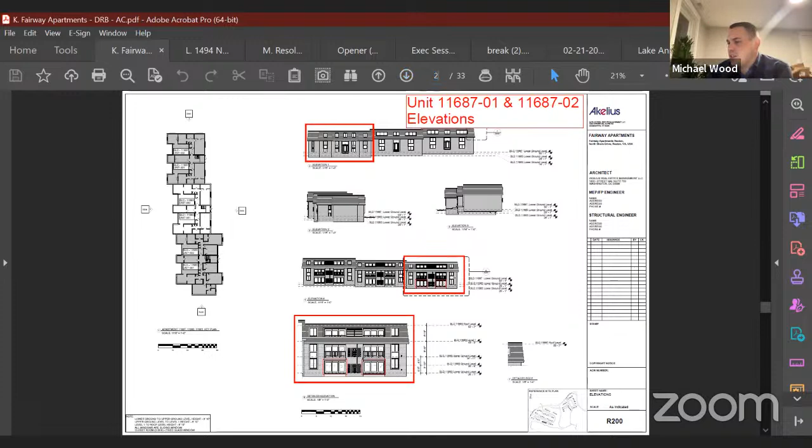Okay, let me go around and see if anyone has questions. Sarah, do you have any questions for Scott? Not at this time, thank you. Elena? No, thank you. Brian? No, not right now. John? No, I looked at the drawings earlier and it seemed pretty much straightforward. Bruce? No questions. Mike? Negative, sir. Jim? No, well, you guys just leave it to me.

I have a couple questions, nothing too crazy. Just to be clear, the new frames you're proposing for the doors, are they going to basically match the existing frame color that's there? It's kind of hard to tell in the pictures. I don't know if the actual back doors are white right now, or if there's a white trim around them with an aluminum colored door.

Yeah, they're white currently. Okay, and are you proposing to go back with, I mean, it's basically looking like right now the current back doors are already split up into 3 sections. You're just replacing the middle with a more formal door versus a slider. Exactly, that's what's happening. So the overall look is not really going to change all that much from the rear.

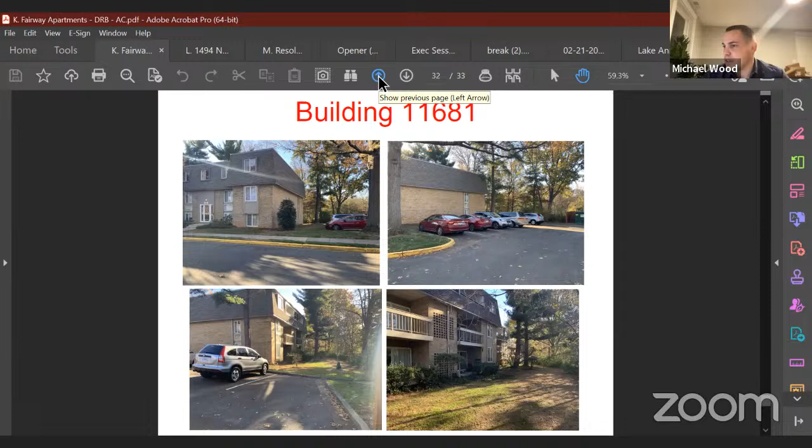And then the only thing is it looks like there's going to be a couple bushes removed from the rears of the properties that are impacted for this new concrete sidewalk, essentially leading to the rear. Yeah, exactly. So that right there, you're looking at a building that's going to have 2 handicap units next to each other, so yeah, those will be removed.

Is there any proposal to put bushes back? That would be my only recommendation, to either try to transplant those or introduce new bushes to help screen these rear patios, which is why those existed to begin with. Yeah, for sure, we can certainly do that. Okay, those were kind of my questions.

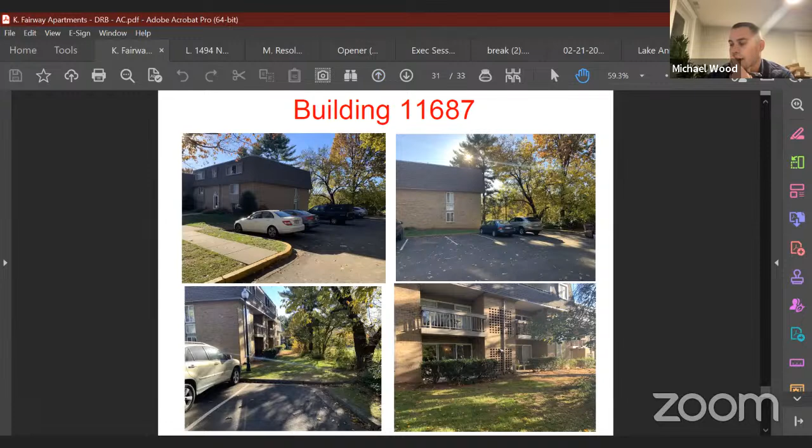Does anyone have any discussion on it? It's pretty straightforward, so I'm happy to make a motion with those. I'll make a motion to approve the application with the stipulation that the 5 unit entrances will have plant screening of similar style to what's existing on the outer perimeter of the sidewalk where the unit door is located.

I'll second your motion, Michael. And commentary, I like the additional screening there. It's there now, let's kick it out and keep it there, right? Yep. There's a motion and a second. Any further discussion? All right, all those in favor, say aye. Aye. Any against? Any abstentions? All right, motion passes. Thanks, Scott.

All right, moving on to application L for the Chick-fil-A North Point Village Center. The busiest Chick-fil-A I've ever seen. We have Frank and Kat Alvarez, both unmuted.

Good evening, everybody. Evening, welcome. Thank you for being patient. If you could walk us through your application for your new canopies. Yeah, I'd be happy to. If you can go to the site plan, is there a way to blow it up so you can get into the site area instead of showing the whole plan, and maybe scroll down a little bit?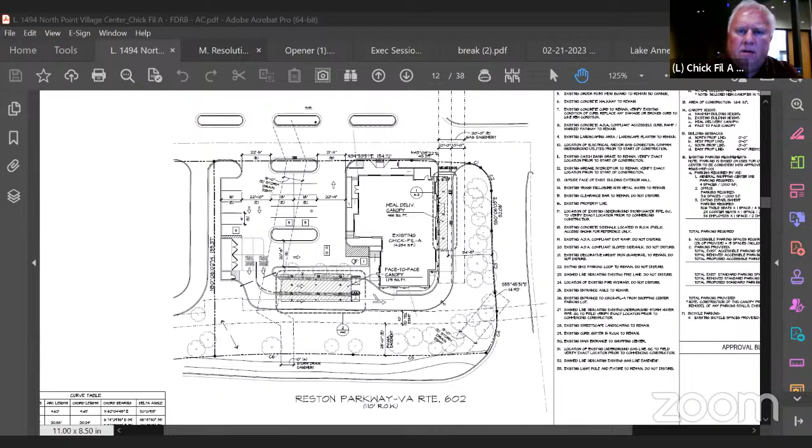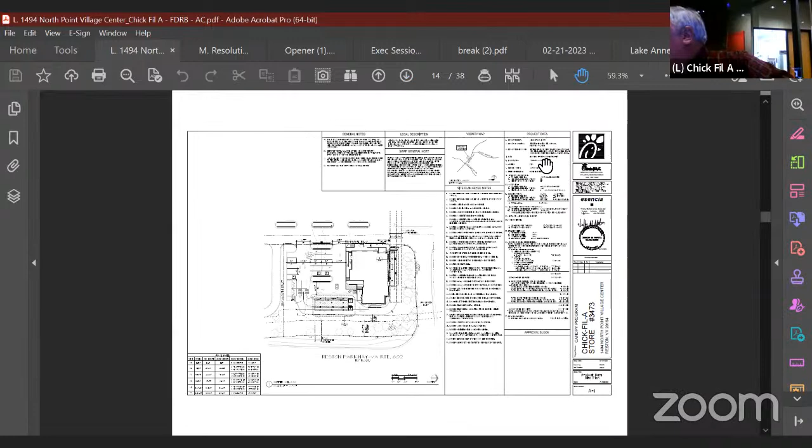If you can go down to probably the elevation sheet, or scroll down to the sheet with the renderings, we can talk a little about the design. Probably the next sheet down, I believe — you should have sheet 4 or 5, maybe. There you go, colored renderings.

So this look you're seeing here is the face-to-face canopy. Once again, we've integrated the trim and Hardie board that matches the building, and the base of the columns have a stone veneer matching the building's stone veneer. The fascia of this structure is a very slimline design — we keep it about 1 foot thick, with a powder coat paint finish in a rubbed bronze look, matching the mullions of the windows in the Chick-fil-A restaurant, as well as any trellis work on the other side of the building.

Canopies are about 9 feet 6 inches tall, so we try to keep them low profile. Again, the slimline design is intended to make it look more in balance as an awning to the building. Our goal is to make this look like it was part of the original build-out of the building rather than a piece added later.

The lighting used underneath here is a low-level LED light, recessed into the canopy, so it won't stick down like you see at a gas station or have that brightness of a fuel station. In some parts of the country — and this may be one of them because of your heat index in summer — we'll install fans near the columns at the top. You won't see too much of them, but they blow air on the workers out there in the heat of the day. The philosophy is that if we can keep team members out there longer, say a 2-hour phase during peak traffic and business times, we push a lot more cars through.

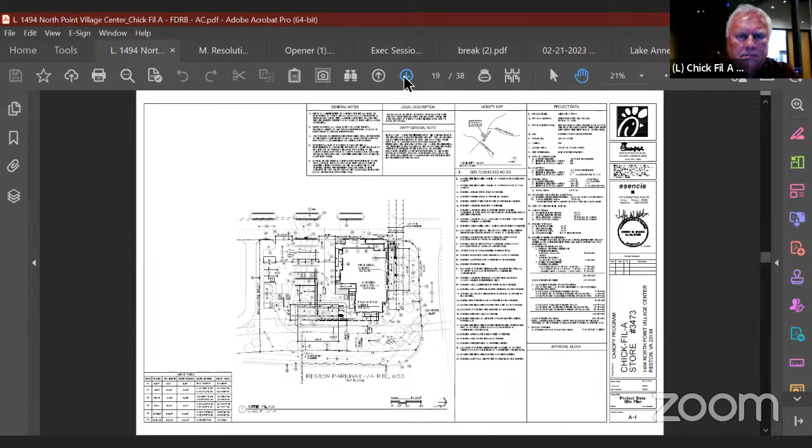If you don't mind, could you please move to the next slide where we have the meal delivery canopy? Oh, I guess it's one more slide up. It's on slide 11. Page 15, Anna Rosa.

Yeah, there you go. That's kind of a full on-shot view of what you'd see with the meal delivery canopy. Again, you can see we use the Hardie board trim and Hardie board itself, and the stone veneer adjacent to the building. The intent again is to make this look like part of an awning rather than a big structure. We've got the bronze powder coat paint finish on there. The decking underneath the canopy is a white powder coat finish — not a bright white, more of a white that matches the trim you're seeing on the building right now. As you see it now, you're really not going to see very much of it here.

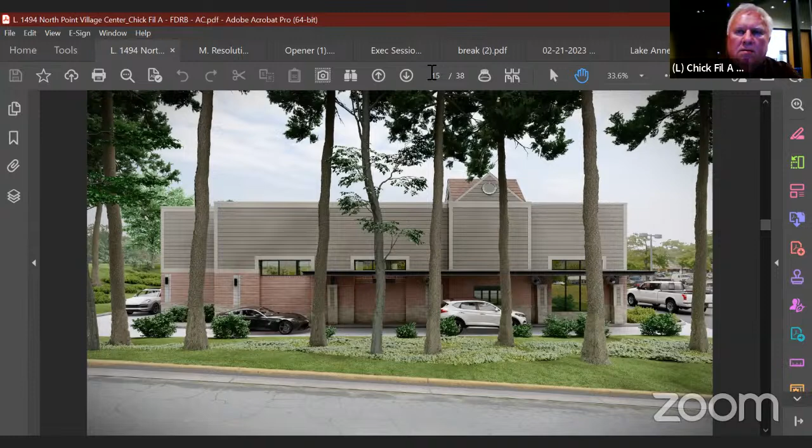So we've seen what this has done at other locations. Some of the stores we were talking about that had traffic issues were averaging about 15 cars every 15 minutes through the drive-through. Now with this new system using Wi-Fi tablets and canopies installed in tandem, they're averaging anywhere from 37 to 47 cars every 15 minutes. So you can see with those numbers, they are drastically reducing the traffic congestion in some of these malls.

As far as we know, there have been no complaints by any of the tenants or anyone in the community regarding traffic issues. But we do hear that this is a very busy store, and it is high on Chick-fil-A's radar to remediate the traffic issue going on there during certain times of the day.

So with that, I'll open up for any questions anyone may have. Great, thank you. Sarah, do you have any questions?

I just had some feedback. I don't know how familiar other members are with North Point Village, but the treatment of the columns they're looking at really speaks to the treatment of the columns on the existing strip mall. When you're walking along there, that same brick treatment - and there's a horizontal thin articulation on the elevation of the strip mall that starts to get echoed here with the thinness of their canopy. There's also a gas station on this site that has a canopy, so we're already seeing precedent for a business having a canopy structure, although I think this one is much better articulated and well scaled for its location.

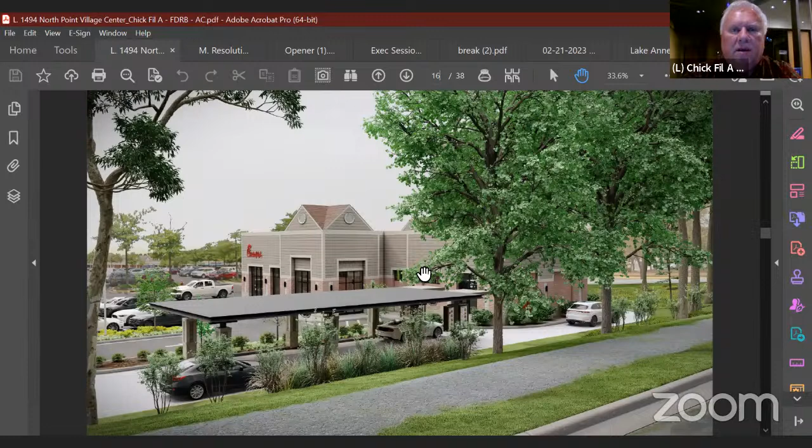Actually, I can probably speak to that. What we're seeing across the country, because this has been a 5-year program in our office, is that we've handled every one of these stores pretty much across America. As these operators have seen their buddy operators get a structure like this, this is all about taking care of their employees, so they've gone out on their own and gotten with a canopy company locally and just put up a temporary awning. Once we come in with this new structure, that all goes away. Some of these operators don't understand there's a method you need to do, like go talk to somebody at the city and tell them what you'd like to do until these kind of canopies come into play. So that might be part of what you're seeing.

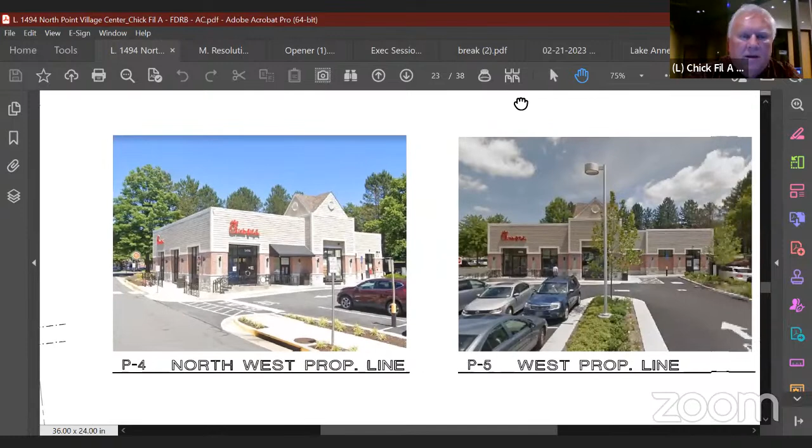Staff, if you go to slide 23 and zoom in on the middle picture on the left-hand side, middle row, far left picture. Go back to your left and zoom in on there. Okay, I see that. So that awning's been added. I don't know if it has approval or not. I'm just saying.

I think integrating this awning you've designed is much more appealing to the structure, and it works much better, in my opinion, on how it works. It's currently very similar to what they have over the existing drive-through pickup window right now, that kind of cantilevered awning with a tension cable. Whereas this awning is much less elegant, let's say it that way.

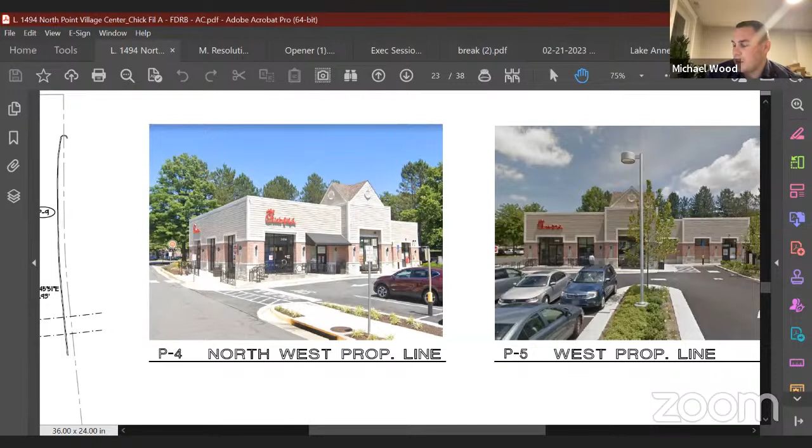I know it probably doesn't have anything to do with you, but I'm going to just put it in the motion for staff to look into it, because I just don't think it's part of an approved modification to the property. So anyways, that's just more of my side note.

Mike, do you have any comments for the applicant? Just a confirmation, and I guess this is just making sure I'm reading the site plan correctly, that we're not making any changes to the traffic flow, not making any changes to the existing lanes, everything's staying the same in terms of. Yeah, everything is going to stay the same. The only addition is these canopies.

Okay, love it. Just knowing the topo there might have facilitated some other nonsense that I was sincerely hoping we were going to avoid. So nothing else from me, Michael.

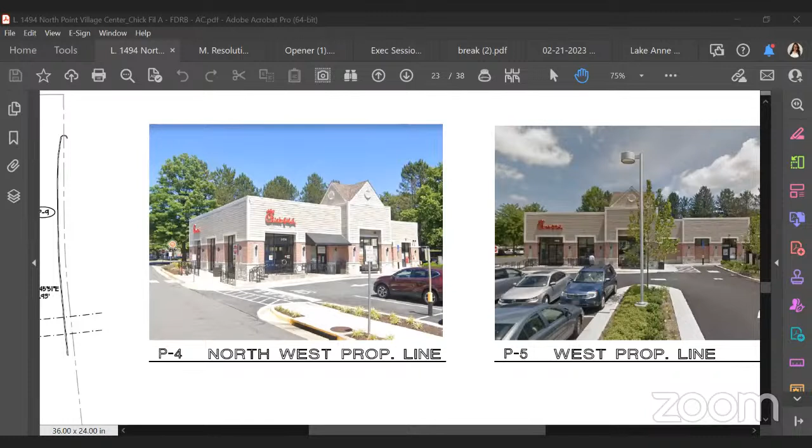Okay, Jim, any thoughts? Looking at the picture on the screen right now, knowing that we're going to be looking down on top of this thing coming down Reston Parkway, the fascia on the canopy, why couldn't it be the same color as the fascia at the edge of the roof up at the top, and the color of the top of the roof be a very similar color to the shingles up on top of this roof? That seems like it would complement and harmonize with what's already there, at least from what I'm seeing. Much better than a dark bronze or a white. You've done a nice job bringing the columns of the canopy into harmony with the building, but if the roof and the fascia colors up there could be closer to that, it seems like it would blend a lot better.

Well, the dark color of the fascia, the bronze anodized look, is there to make this appear as part of the original build out of the store where we have these trellises. Now, this store doesn't have the trellises, but it has those bronze anodized aluminum mullions, and that's the look we're doing all across the U.S. I think if you go to a lighter color, you're going to lose a little bit of the punch this gives, but we can certainly give that a shot and see how it looks and go from there.

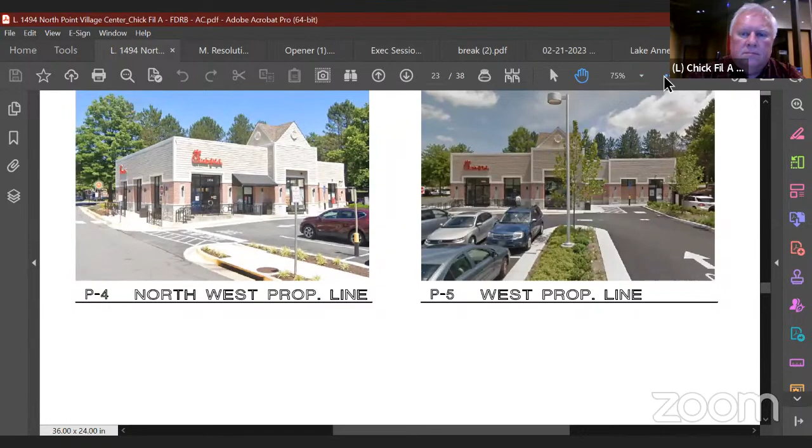The darker color, to me at least, on the fascia on the canopy just looks very heavy visually.

Yeah, we don't have a problem going to the white trim that you see on your Hardie board for the fascia. That's not a problem for us. It just seems like, since you're going to be looking down on this thing, like as everybody else has commented, to get it to blend even more with the existing building, just pick up on the colors that are already there, the roof color and the fascia color.

Yeah, from a discussion standpoint, I don't know if I agree, Jim. I think the dark bronze does kind of give it this... at the end of the day, it's a much nicer canopy than whatever other people put at gas stations and other things. I think it gives it a slick appearance that molds in well. I'm just more worried about the roof color, but that's just my opinion on it.

Any other comments, Jim? No, that's it. Let's have a little further discussion. We've had some ideas thrown out there. Overall, I think we're all kind of for the design, but does anybody have any other ideas, final things we could talk about before we make a motion, specifically maybe the roof color, and a recommendation to give the gentleman some direction?

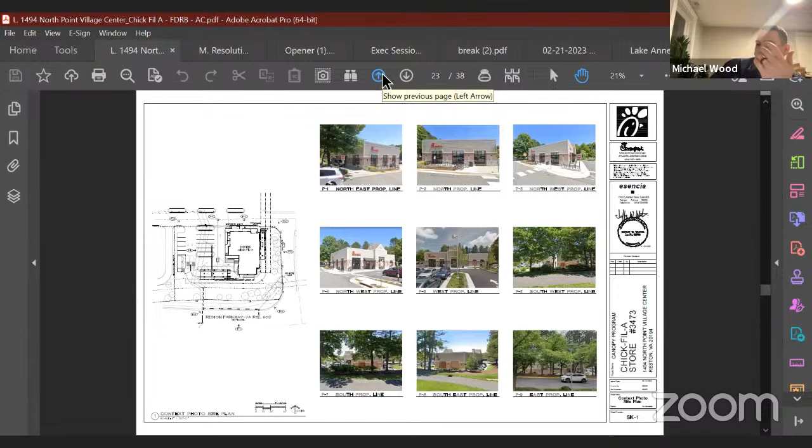The one thing I pulled up quickly, since I was there earlier today, ironically enough, is that from the street view you can see the existing menu board signs have a small canopy at the same 9 feet height that they're proposing for this, and the current top of those canopies is visible even from the street view. It looks like the canopy itself is a dark bronze perimeter, and then it has kind of a light gray roof, from what I can tell from the street view. So it is going to be visible, and I think that just kind of confirmed my thought.

I think a color that mimics the roof of the existing property, like Jim is referencing, would work. I think what's tough is it's an asphalt shingle, so trying to get the right color on metal is probably not going to be easy. So I'm leaning more towards doing a color that, even if they want to keep it lighter, they use just the trim color of the building, which is more of a lighter cream color rather than a stark white. I think that would even be an improvement over it being stark white.

So I don't know what you guys think about that, but that way if you wanted to do the double-sided color, if the manufacturer said it had to be one color, you could do the trim color, that way it's more of just an off-white. Yeah, I see what you're saying, that makes sense. I would say let's see where it goes.

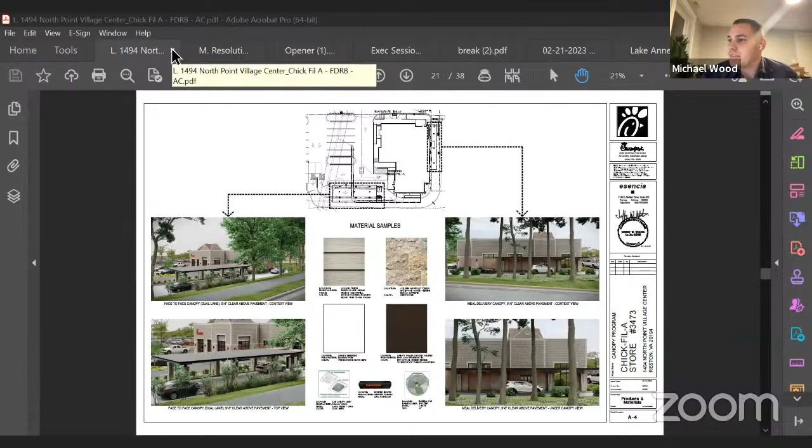I tried to get to you as fast as possible, man. No worries, let's make this two minutes. Let's see if I can.

So we have two very small changes to the resolutions that you all reviewed: Resolution 8 and Resolution 10. The small changes are highlighted in yellow in the documents. The first is related to Resolution 8. We added language to formalize the DRB's position that deferred decisions cannot be appealed. That was one of the things that came up at the last DRB meeting, so we're putting that into the resolution. Only approvals or disapprovals can be appealed.

The second part is Resolution 10 related to affected parties. We simply added language to ensure complainants for design violations would be provided a copy of the application and the ability to request affected party status. That was one of the things that came up as we were going through this process—we wanted to make sure staff had the ability to do that and formalize it in the resolution.

So I am looking for the DRB's approval to move forward with this for board review. The board is reviewing these changes at the February 23rd meeting, two days from today, for final review, approval, and adoption as permanent resolutions for both DRB Resolution 8 and 10. So any questions?